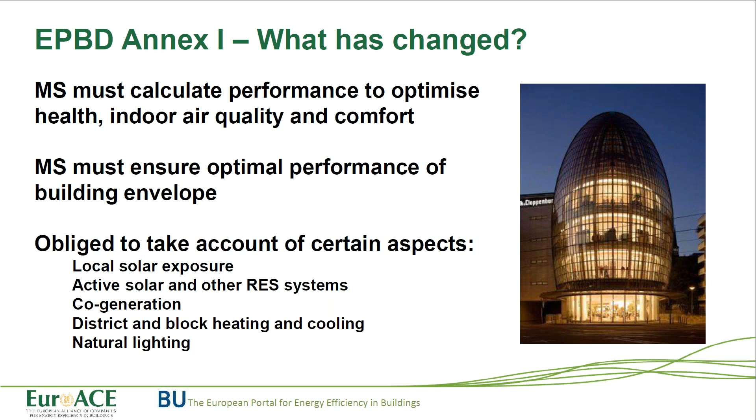In Annex I, we also see a discussion on how renewable energy systems should be treated. Renewable energy systems are, of course, those that do not call on the energy grids or supplied fossil fuels, like gas or oil, to meet the needs of building occupants. In the amended Annex I, renewable energy sources must be treated in a non-discriminatory way, and our speaker Dimitrios from DG Energy will address that topic in more detail.

What's interesting is that renewables on the building do count towards the energy performance of the building, thus reducing demand on grids. We're happy to see that in the annex, the emphasis must first be on reducing energy demand and then looking at renewables on the building—that's how the annex has been written. We see this as very logical because it relates to the nearly zero energy building standard definition. By emphasizing improving the performance of the building first and then looking to the renewables element, it follows the logic of the nearly zero energy building definition included in the directive, which was unamended during the recent changes.

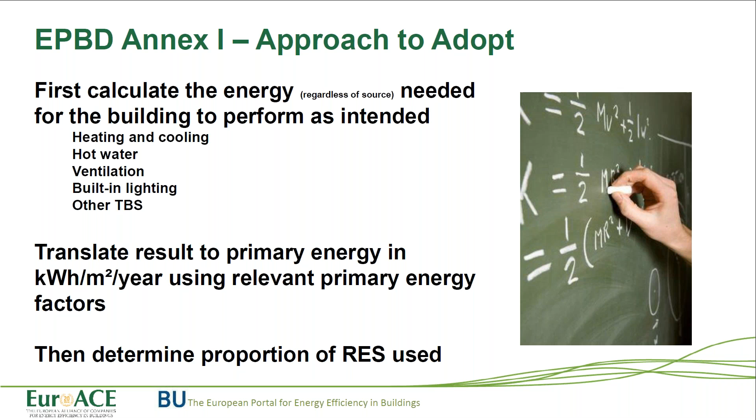The last opportunity we see is that this methodology could lead to increased comfort and health within buildings, and that emphasis is something we welcome very much in the amendments to Annex I. But there are risks, for us, that the comparisons may not be possible after all, depending on how member states design and implement their own methodologies. If the changes member states implement following the amendments are great, there could be a discontinuity between the current methodologies and ways of expressing energy performance and the future methods. We feel there's a risk the credibility of these methodologies could be undermined if the changes are too radical or not well explained as they're brought into force.

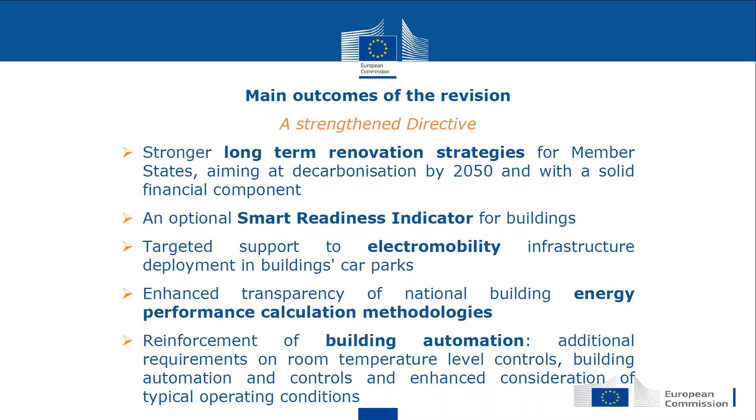And of course, Annex I is also revised to provide, as we will see later, more transparency to the calculations. Annex I provides, as Adrian just mentioned, a general and common framework for the calculation of the energy performance of buildings. The calculation of energy performance is at the core of the directive, and Annex I only tries to provide the general rules for how member states should think of these calculations.

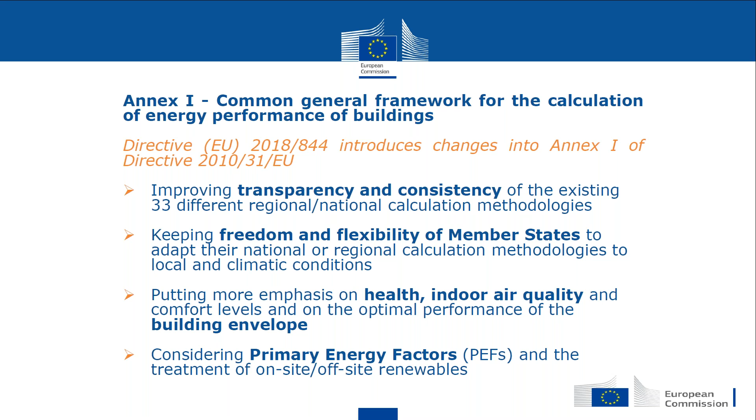So the intention for the revised EPBD to review Annex I was actually to provide more clarity, to provide member states more guidelines on how they should calculate it, and to also highlight some more factors to be considered, such as health, indoor air quality and comfort levels, as well as the consideration of the building envelope, and of course primary energy factors and treatment of renewables.

We see, and this is how we have actually structured our guidance document on Annex I, that we can discuss all these revised provisions in three major blocks, and one of them is related to the new obligations for member states to describe their national calculation methodology following the national annexes of the overarching standards.

So this is not about asking member states to mandatorily use the standards. The standards will remain on a voluntary basis for member states to comply with, fully or not, depending on their national methodology.

So again, Annex I and its revision is not about requiring member states to harmonize their calculation methodologies. We only ask for more transparency, in order to see how all the different calculation methodologies across the member states can actually be compared, and then through this exercise maybe we can see what can be improved, what can be, let's say, harmonized, but on a very gradual and future step.

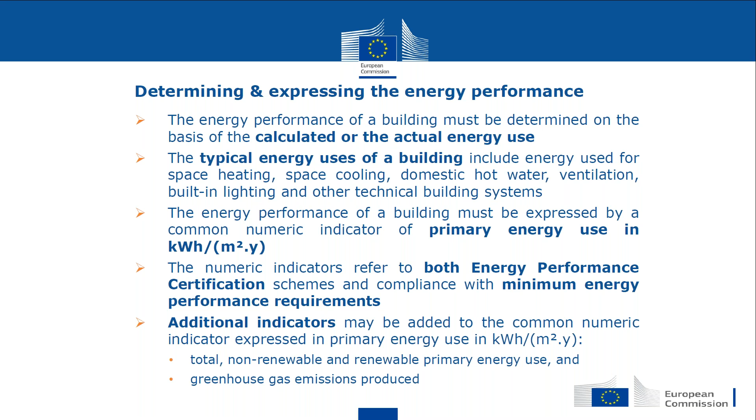So we have to see on a case-by-case scenario what the issue is, but it has to be clear that this indicator has to be somehow related with primary energy use. We have already examined a couple of situations, and in any case, member states will find a solution also in relation with these additional indicators that member states can also consider.

Another thing that Adrian mentioned, and it is not very easy from the first glance for everybody to realize, is that, as Andrea said, the annex now provides for a more holistic approach related with the methodology for the calculation, by just deleting 'where relevant' in the calculation related with extra conditions like solar conditions, electricity produced by cogeneration, district heating, and natural lighting.

So, as Adrian just mentioned before, now it is not up to member states to consider those extra and very important aspects for the methodology, but they have to do that. They really have to take into account the solar conditions, natural lighting, and even try to reflect on conditions by member states. Even if this is not common in some cases, they still have to see what is there.

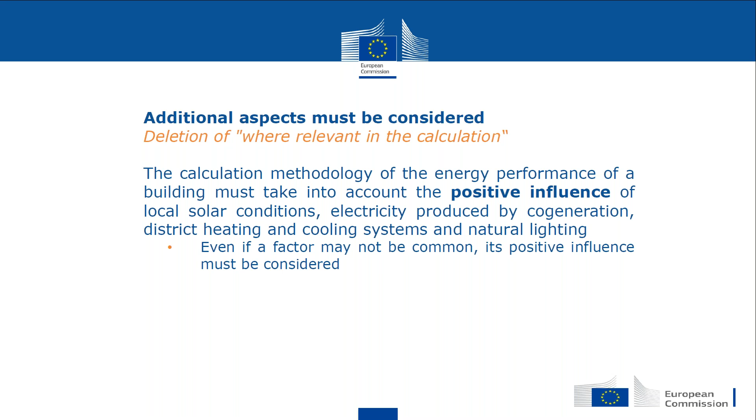And of course, if, for example, there is no well-developed district heating in a country, then this has to be at least considered, and see if there is room, for example, to make a link with district heating solutions to develop also in relation with the other directives, like the EED and the renewables directive. So it's a big discussion, but the idea is that now member states have to consider those additional factors.

So the third big block of, I must say, well-debated points during the trialogues has to do with primary energy factors, and not only that. So briefly, to mention that primary energy factors, it is clear that it is the responsibility of member states to determine and to define. This is clear.

What the revised EPBD in Annex I tried to do is to provide more clarity on how these are calculated, because it is true that the values differ significantly among member states, and the problem is that it is not at all transparent how these factors, the primary energy factors, are finally determined. Again, it is not the intention of the revised EPBD to interfere with member states' competence on how to define primary energy factors, but it is only about improving transparency, comparability, and making the methodologies easier for everyone to understand.

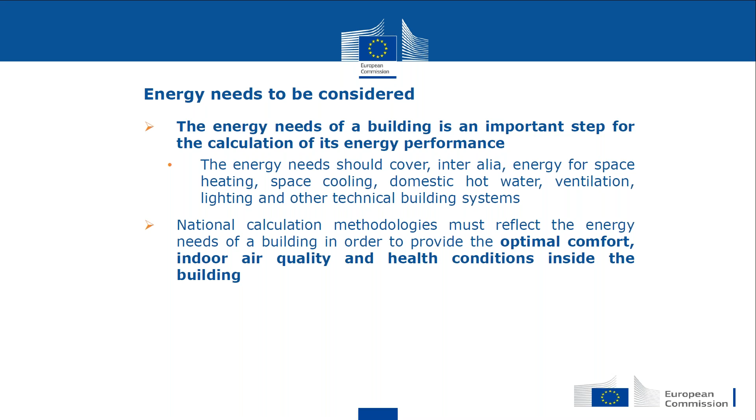And with regards to the discussion about putting energy efficiency first, which is also related with the broader political agenda of putting energy efficiency first, and it's not only about the building.

I have to mention that the Clean Energy for All Europeans package is very important to say that it is on top of this political discussion, and now the outcome of this package is that there is a clear definition in the governance regulation about putting energy efficiency first, and what this is. In few words, it is about asking all other policies to also consider the energy efficiency dimension before implementing their own individual actions and policy measures, and so on.

This is very, very important because, during another EuroACE workshop, our head of unit mentioned that we usually tend to say that we like energy efficiency, and that it is high in the political agenda, but then we don't necessarily do the actions to support and promote it on the ground. So it is very important that the Clean Energy for All Europeans package starts from this point and makes it clear. It is important that we have a definition there, and it is also important from the building's perspective that energy efficiency must always be pursued.

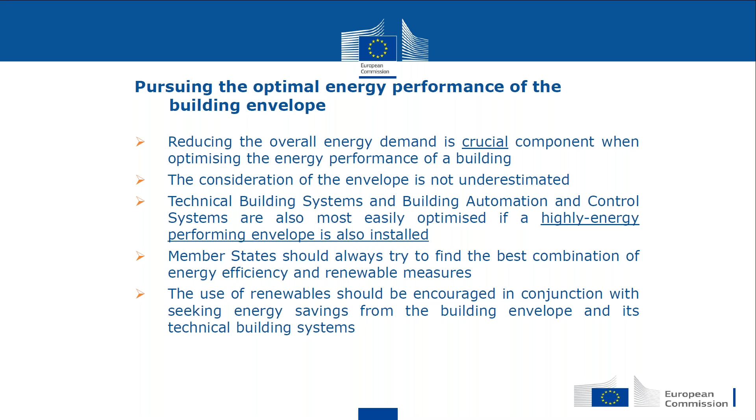But it is very important that we have this provision there, which shows that in any case, member states have to always seek the best combination of energy efficiency and renewables measures, and on a case-by-case basis, always find the best solution, whether through on-site or off-site renewables.

This was also very well debated. There was a big discussion on how renewables should be treated, and the question now is how they should be treated when calculating the primary energy factors. So again, we start from member states' flexibility to take into account renewables if they want. But if they do so, they have to respect the non-discrimination basis, which in other words means that comparable situations must not be treated differently, and different situations must not be treated in the same way. There is a big discussion over it.

What we would like to say is that renewables are a good thing, of course. They improve the energy performance of the building and reduce the primary energy associated with the delivery of energy. So since we express energy performance in primary energy use, renewables play a role, but as we said before, we always have to consider renewables together with energy efficiency measures in the envelope and other technical building systems.

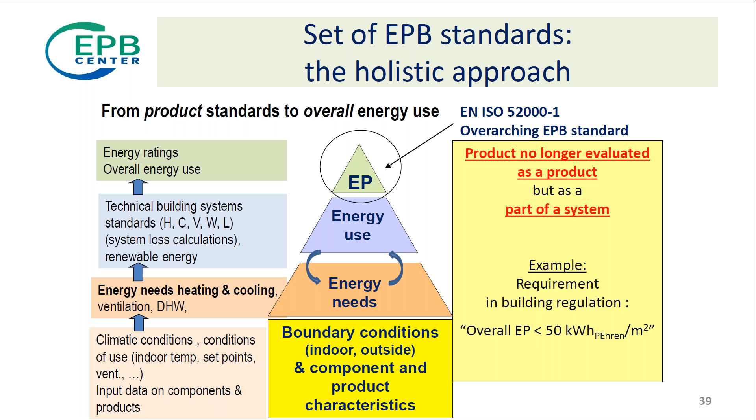Next, I say a few words on the holistic approach. The essence is that we do not look anymore at the products we use to build buildings and installations as products as such, but as an overall integrated system. So from the boundary conditions at the bottom and the component product characteristics, we go to the energy need calculations, energy use, and finally the energy performance as expressed in the overarching standards 52000. So from climate conditions to energy needs to technical building systems and energy ratings.

Next, I say something about the current status. Many of you will know that all standards have been published meanwhile, last year, and that was the last standard now out. In total, 53 standards. 17 of them are also ISO standards in the 52000 family, and 36 are just European standards, but we will also try to bring them to ISO level as well.

Connected to the standards are 39 technical reports, because the standards contain normative text, while all the justification, background information, and calculation examples are included in the technical reports, to make the experience accessible also for people who were not involved in the creation process of the standards.

Now, I think the next step is to implement those standards in national building regulations. Of course, as Dimitrios from DG Energy says, it is not a requirement for the member states to use these standards, but in Article 3 of the EPBD, it is, you could say, at least encouraged to use them as the basis of the national procedures. And even stronger, in Annex I of the EPBD, there is a new obligation for the member states to describe their national calculation methodology following the annexes of the 5 overarching type of standards. I will come back to that later.

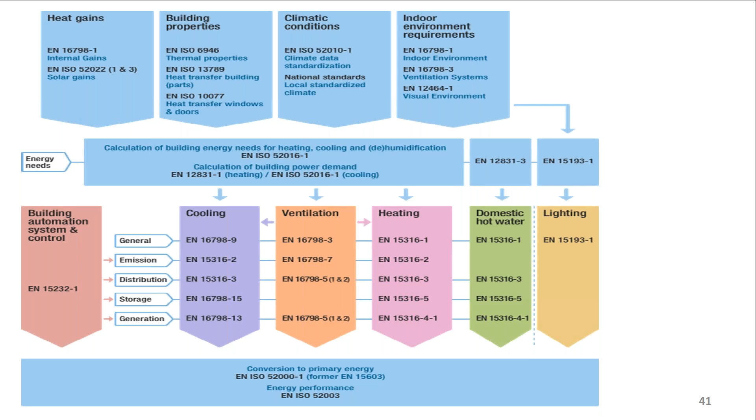Finally, this energy use has to be expressed in primary energy terminology, and this is described in the overarching standard 52000-1. And in EN ISO 52003, we also give procedures for how to express it in partial energy performance indicators and how to report this sort of data in the form of an energy certificate, which does not have to be followed precisely - if we look around Europe, we see different sorts of certificates, different as pictures, but they should at least include this sort of information as described in these standards.

In the next slide, I try to give just an overview of the matrix of the module structure. The matrix is much bigger, so you see only a part of it, and each standard includes on one of the first pages this matrix, showing that one of the empty boxes is filled in by this standard, and it describes how it is interconnected with the other boxes, just to illustrate the modular structure of the set of 53 EPB standards.

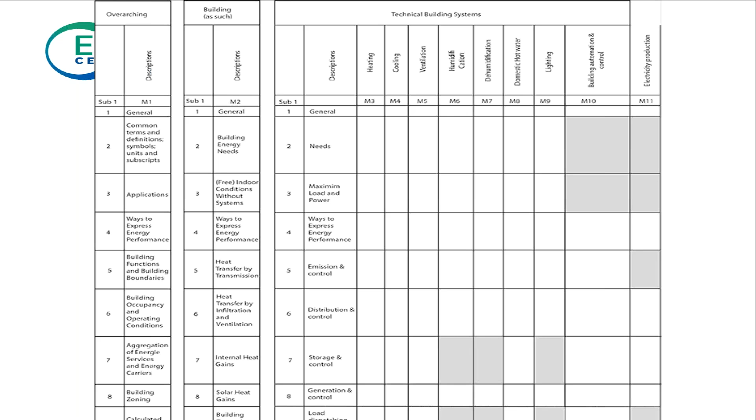In the next slide, I want to say a few words on flexibility. It is a harmonized, modular set - a consistent and transparent package of standards, written so that it should fit in the context of the regulations you have on national level, but we also know that it should be flexible.

And there are clearly identified options. National data are necessary because of the fact that we have different climates in Europe, different traditions, building typology, and legal frameworks for national building regulations and policy. So those factors are flexible. I will come back to that later.

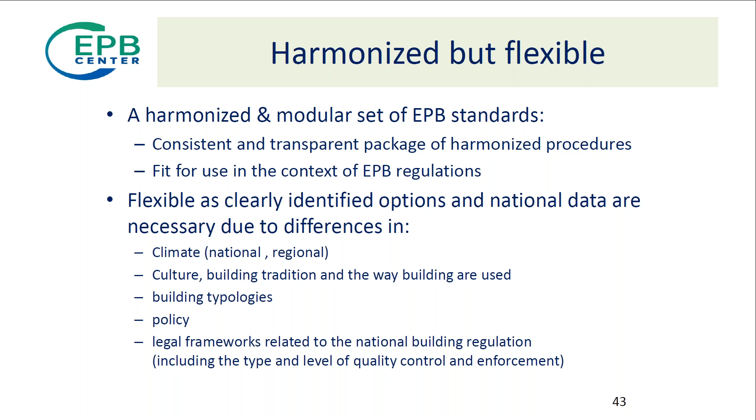So how to implement these standards? All the standards have an Annex A and Annex B. I don't go too much into Annex B. The Annex B is a filled-in Annex A, where all the typical choices, levels of simplification, and values that you have to agree on at national level have been filled in for a more European approach.

Annex B is added to all the standards to make it possible to use a standard without first deciding on all the boundary conditions and levels of simplification, and is an excellent example of how to use the standards for pan-European procedures like European voluntary certification schemes and that sort of approach. But Annex A is, you could say, an Annex B without any numbers and any choices.

And there, the member state, the national regulator, or the national standard body can fill in how they apply this procedure in their national context. In the next slide, I go a little bit into why this flexibility of national annexes is required.

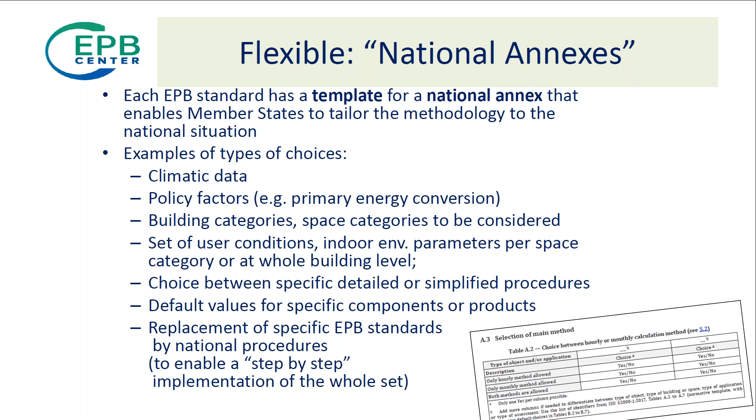This is the flexibility. Next slide, I want to say a few words on the role of the EPB Center, based on the service contract we have with DG Energy to support the dissemination and rollout of the set of standards. We started in September last year, and this project will run for three years.

Next, we see the services we intend to deliver to the member states and the national standard bodies: to complete the national annexes of the overarching type of standards mentioned in Annex I of the EPBD, disseminate information and promote the use of the overarching standards, but also other standards, and provide an information service for all involved stakeholders from industry to engineers and professional organizations and financial institutions who are involved in the work on EPB standards.

Next, we develop knowledge tools, frequently asked questions on key issues, questions on how to fill in the national annexes, of course, or how to use standards, or how to find my way, how to understand certain phrases in standards, or sometimes also questions on whether there are perhaps typos or shortcomings in certain standards. We also give answers on that.